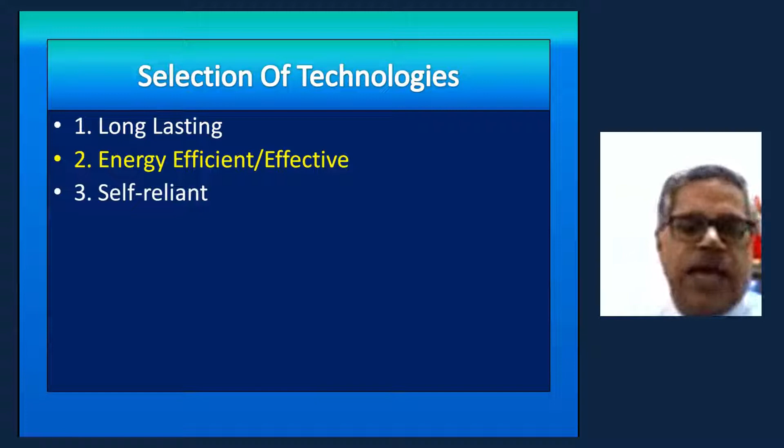So how we select a technology, that we have to see. In general, we select a technology based on it being long lasting, energy efficient and effective, self-reliant—meaning we should have that technology with us and be able to develop it further in-house—and then eco-friendliness. How much weightage we give to eco-friendliness depends on how much knowledge we have about the eco-friendliness of the system, or how much budget it takes to save the environment or our health.

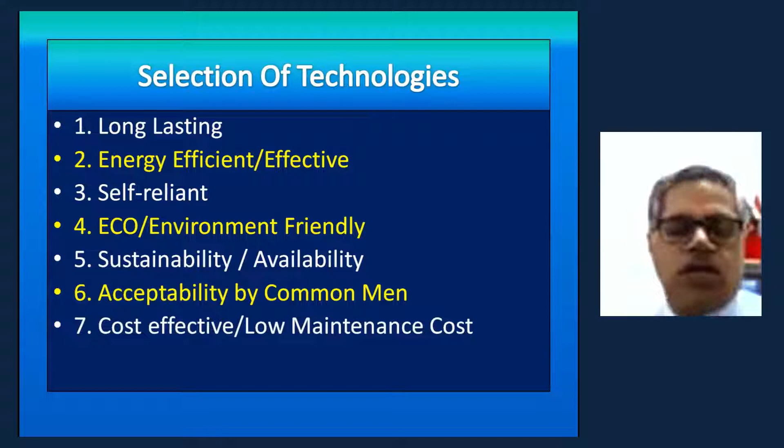Then we see sustainability. The project, whatever it is, should sustain itself—basically it should generate the same revenue and we should not require any fund from outside. But let us see whether we require fund from outside or we can generate fund ourselves. Then comes acceptability by the common man. Whatever mode of transport we select, we have to see its acceptability by the common person. Then it should be cost effective with low maintenance cost, and finally the availability of fund and the political will.

We have seen different kinds of mobility in cities like car, taxi, buses, cycle, pedestrian, metros, tram, trolley, and private car. And a few other modes of transport: airplane, subway, taxi, buses, tram, railways, bike, cableway, and ship. But now we divide all these transportation systems into two different categories.

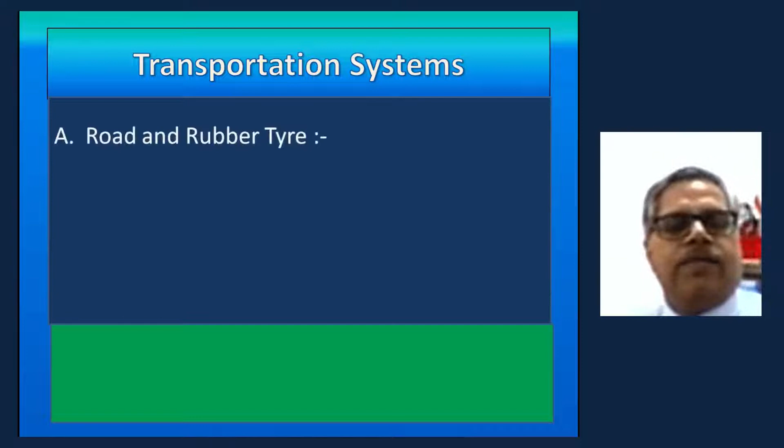Category number one is road and rubber tire. Here we use the road made of asphalt or cement, and run over it two-wheelers like bicycle, motorbike, and scooters, three-wheelers like auto rickshaw and battery rickshaw, and four-wheelers like taxi, minibus, city bus, trucks, and finally we are heading towards electrical buses and electrical trucks. The second mode is railroad and steel tire, which includes Indian Railway, Metro Rail, Metrolite, and the dedicated freight corridor for goods transportation.

Now coming to why we should avoid the personal vehicle, you can see the comparison. For transporting 50 people from one place to another, we require road space. You can see the road occupation by pedestrians: on the left side, 50 pedestrians are grabbing that much road. Then 50 cyclists, then 50 people in a bus, and then if we use personal vehicles, 50 people in 33 cars, you can see how much road we need.

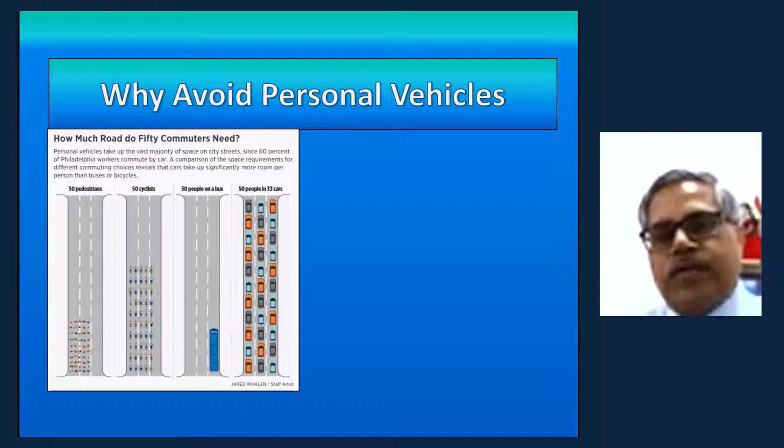Now coming to carrying 50,000 people per hour per direction in a city: if we have only cars, it requires about a 175-meter wide road. If we switch over to buses, it is still big, but only 35-meter wide road, and since space is reduced, we have room for some greenery. When we go for the metro, it requires only a 9-meter wide track, with lots of greenery from one side to the other.

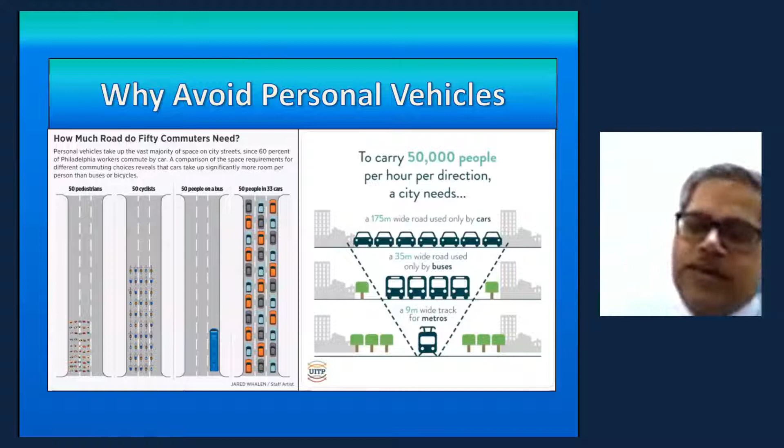Now coming to pollution. Normally when we see pollution, it means whatever we can see, but there is some pollution which we cannot see. So we will be seeing here exhaust versus non-exhaust pollution. Till now we are concentrating only on exhaust pollution, and thereby we are taking all the steps.

This chart shows that exhaust emission is only 14% out of the total pollution created by vehicles. The remaining 86% is either from wear of brakes, wear of tires, road wear, and the resuspension created by the vehicle when it drives on the road.

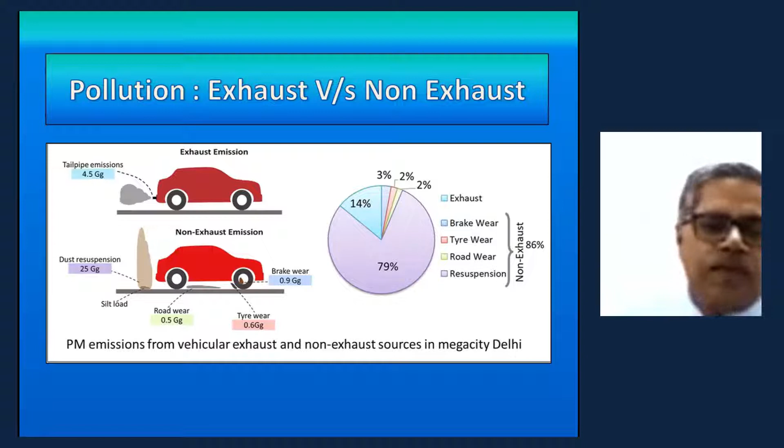Why eliminate rubber tire? Why am I so concentrating on eliminating the rubber tire on the road? We will see the tires are plastic polluters, and they are a sneaky source for all pollution.

What are the environmental hazards? By 2015, about 322 million tons of thermoplastic was created for production of tires. And out of that, by 2010, about 12.7 million tons has gone into the sea and river. Pollution of the environment with plastic is recognized as a serious global threat because it can negatively affect human health, aquatic organisms, as well as the economy.

Tire wear and tear is a sneaky source of microplastic in our environment, which can only be addressed effectively if awareness increases, knowledge gaps in quantities and effects are closed, and creative tactical solutions are sought.

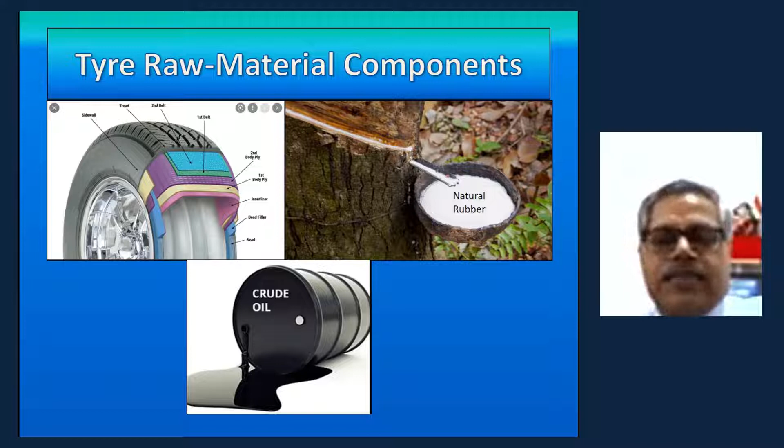Now let us see what the tire is made of. The tire is basically made of natural rubber, which is then mixed with crude oil to give it the shape of a tire. A tire is made of about 19% natural rubber, 24% synthetic rubber, and for making one car tire, about 7 gallons of crude oil is consumed, and for one set of truck tires, 22 gallons of crude oil is consumed. So producing tires still has a monumental environmental impact.

Number one is deforestation: we are removing trees that have stopped giving natural rubber. Similarly, climate-harming fossil fuels are used to make synthetic rubber. But what is also becoming increasingly clear is that as rubber wears and tears, it throws off tiny polymer particles that often end up as pollutants in the ocean and water.

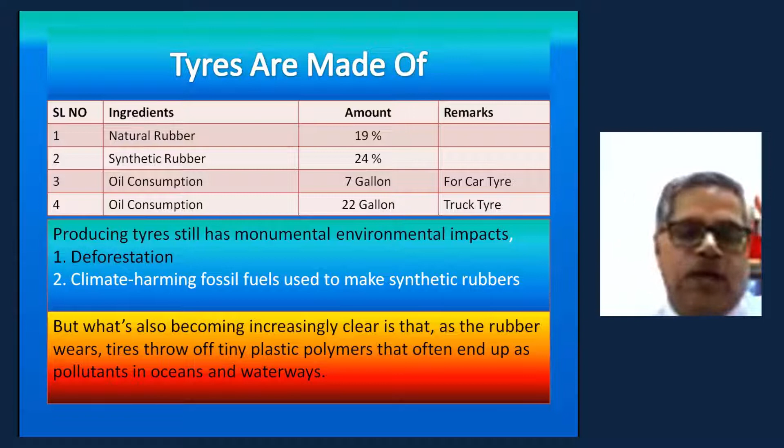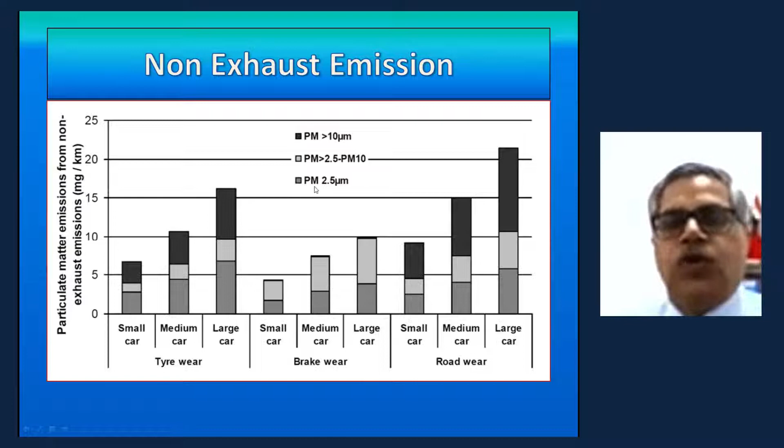What is the problem with the 2.5 micron particle, known as PM 2.5? It cannot be filtered by the normal mask which we wear while driving our cars or going outside. So it is a cause of concern that these 2.5 micron particles need to be taken care of.

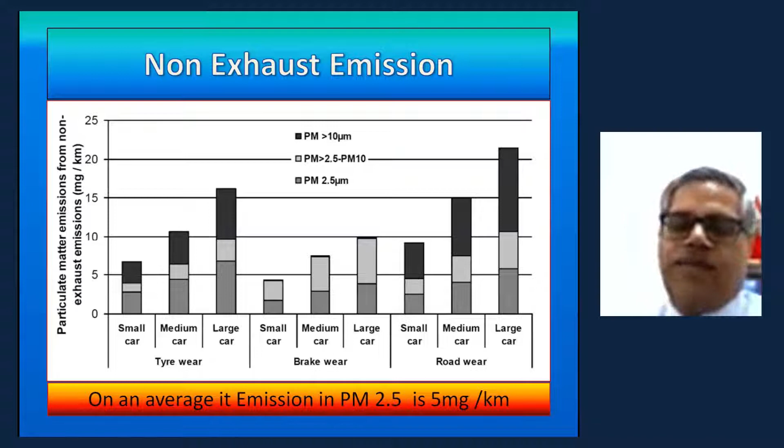On an average, its emission in 2.5 particles is 5 milligrams per kilometer. So if a car drives 1 kilometer, it creates about 5 milligrams of PM 2.5 pollution.

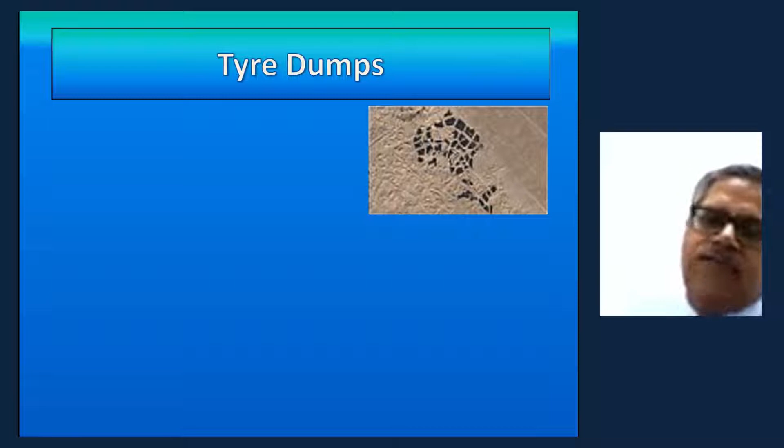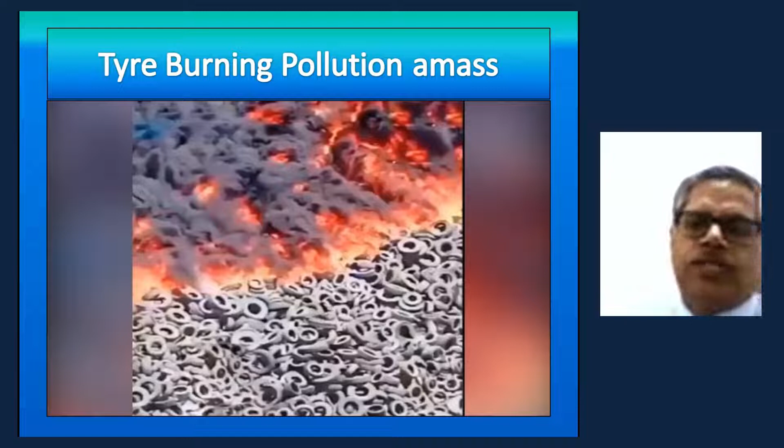Here is a figure taken from satellite. It appears to be a very nice, artistic figure, but this is basically a figure of a tire dump. From the near view, you can see this tire dump, and you can imagine, if it can be seen from satellite, how huge the tire dumps are on earth. Then they burn the tires in a mass to destroy them, which is also one of the major causes of pollution.

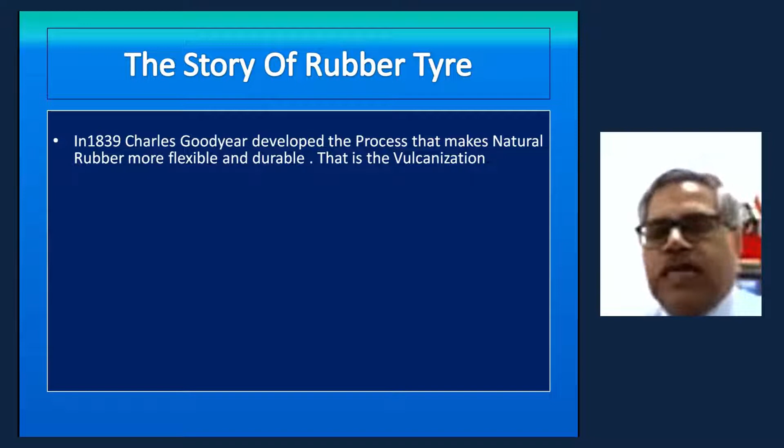If we see the story of rubber tires, it started with the invention of a new method known as vulcanization, for making rubber more flexible and durable. It was started in 1839 by Charles Goodyear.

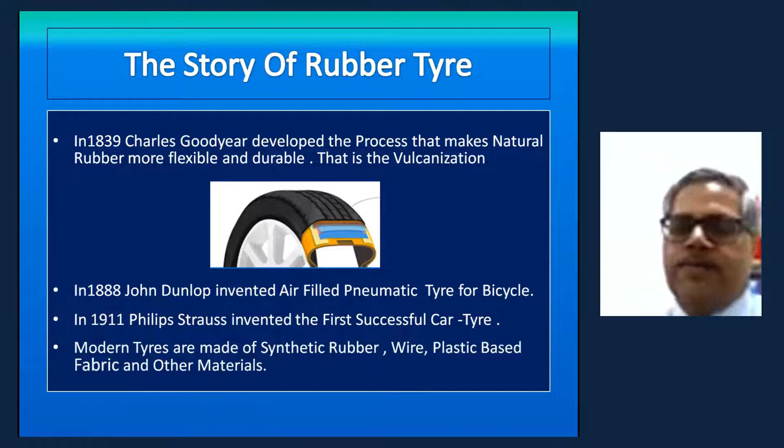In 1888, John Dunlop invented the air-filled pneumatic tire for bicycles. In 1911, Philip Strauss invented the first successful car tire. Modern tires are made of synthetic rubber, wire, plastic-based fabric, and other materials.

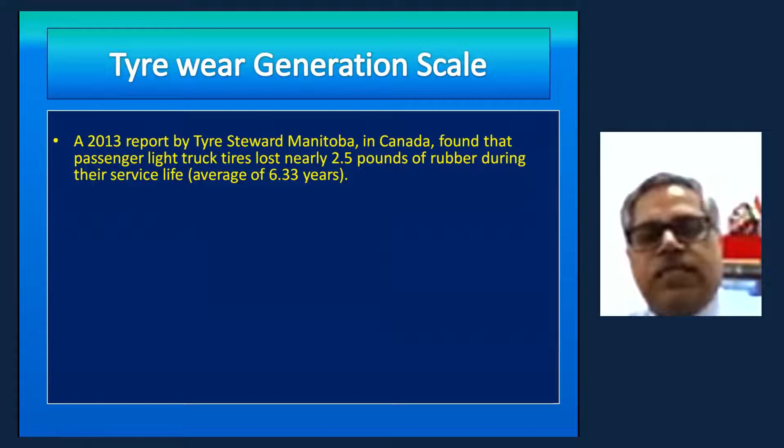Tire wear generation scale: if we look at the scale of tire wear generation, about 2.5 pounds of rubber is generated over the average life of 6.33 years of a tire. This is found from the study. Similarly, about 1.8 million tons of microplastic is generated by the US every year.

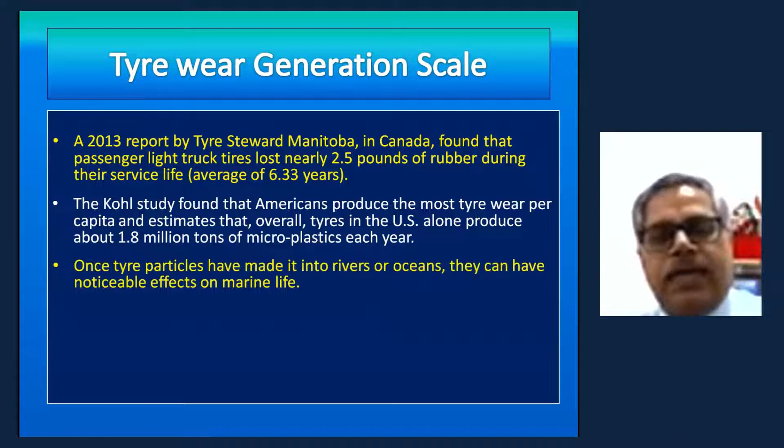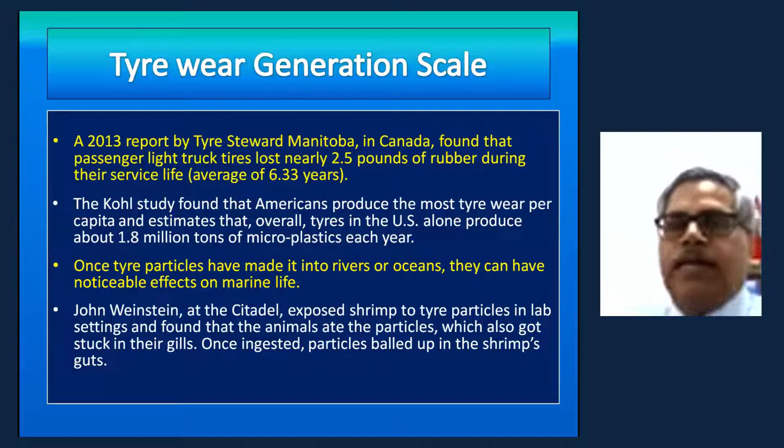Once tire particles make it into a river or ocean, they have a noticeable effect on marine life. John Weinstein at the Citadel exposed shrimps to tire particles in a lab setting and found that the animals ate the particles, which also got stuck in their gills. Once ingested, particles balled up in the shrimp's guts. So if you eat the shrimp, the particles go into your guts and remain there, undigested, which can create various kinds of problems.

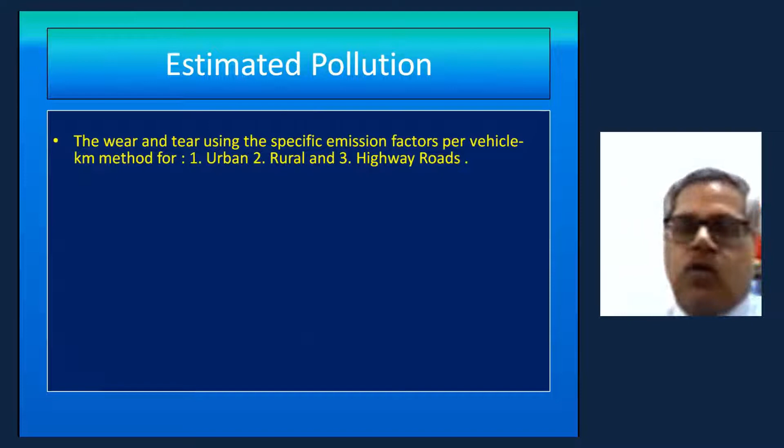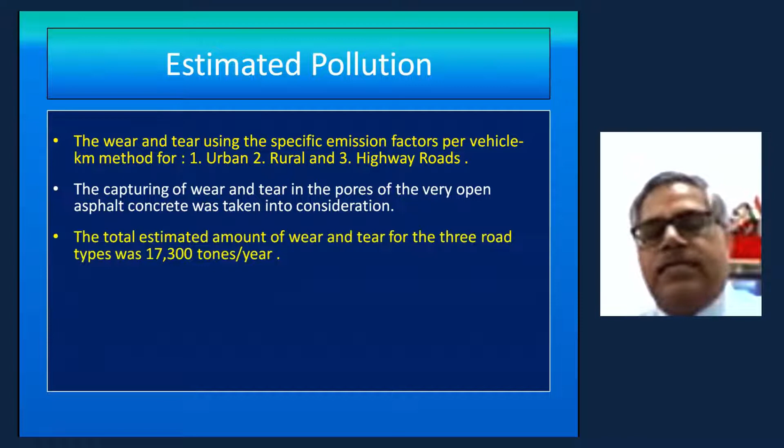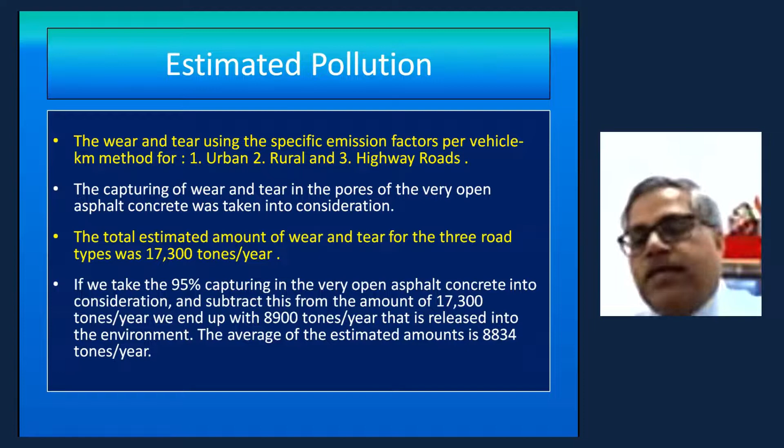Estimated pollution: considering urban, rural, and highway roads, we find that the maximum particles created by tire wear are concentrated and absorbed by the large pores in the road's concrete asphalt. The total tire wear is about 17,300 tons per year. If about 95% is captured by the asphalt and 5% goes elsewhere, that amounts to about 8,834 tons per year.

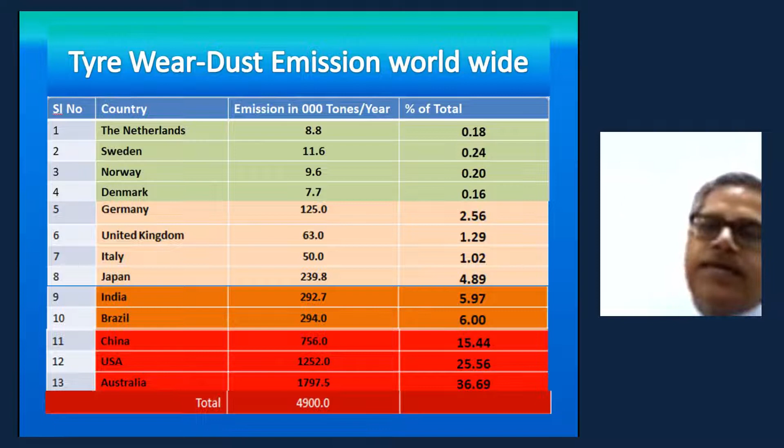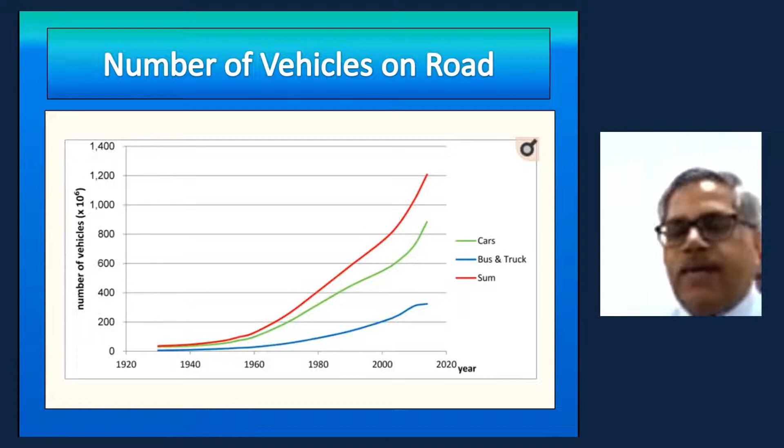The number of vehicles on the road has grown from 1920 to 2020. It has gone from starting around 50 million vehicles to 1,200 million vehicles by the end of 2019.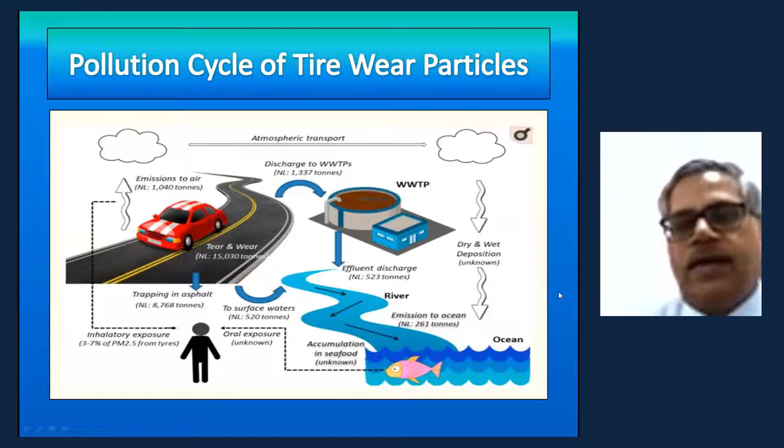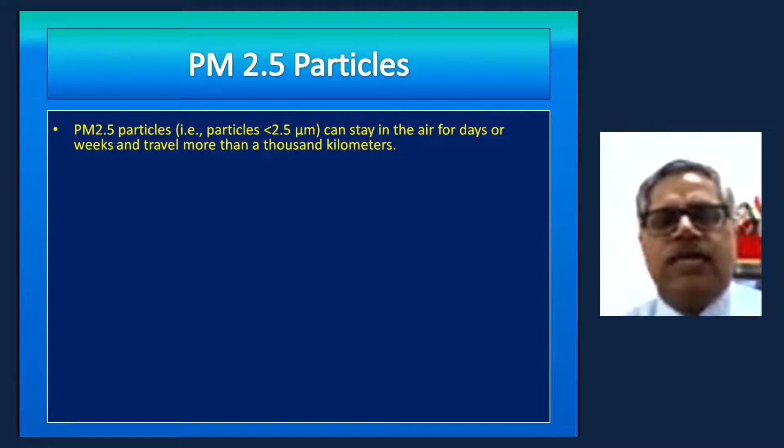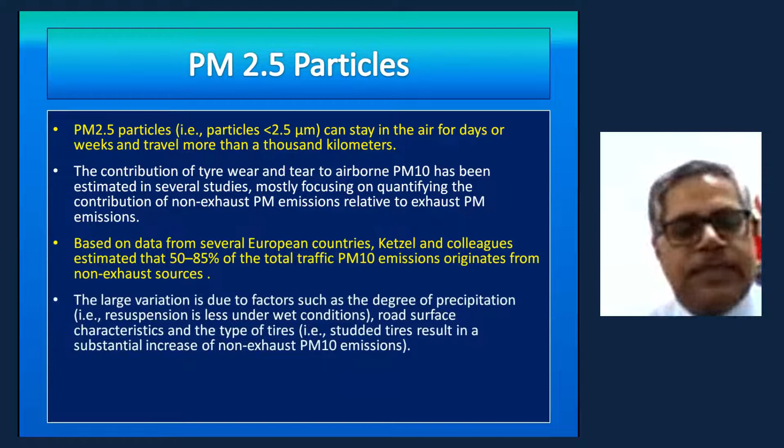What are PM 2.5 particles in the air? Once formed, they stay in the air for weeks and travel more than 1,000 kilometers. The contribution of tire wear and tear to airborne PM10 has been estimated in several studies, mostly focusing on quantifying the contribution of non-exhaust PM emissions relative to exhaust PM emissions. 50 to 85% of total traffic PM10 emission originates from non-exhaust sources, with large variation due to factors such as the degree of precipitation, road surface characteristics, and the type of tire.

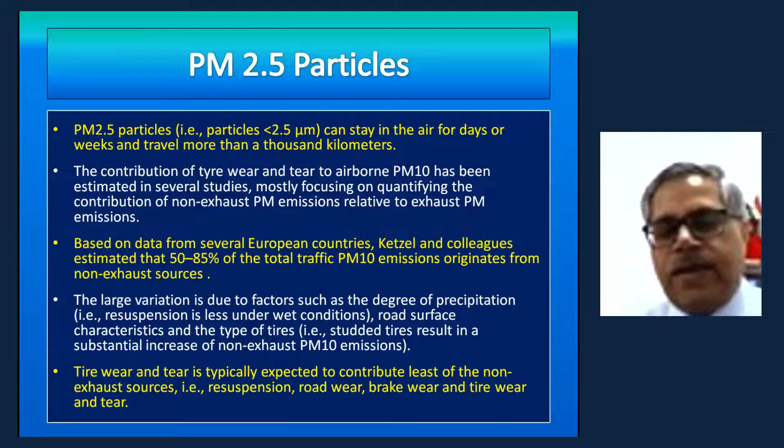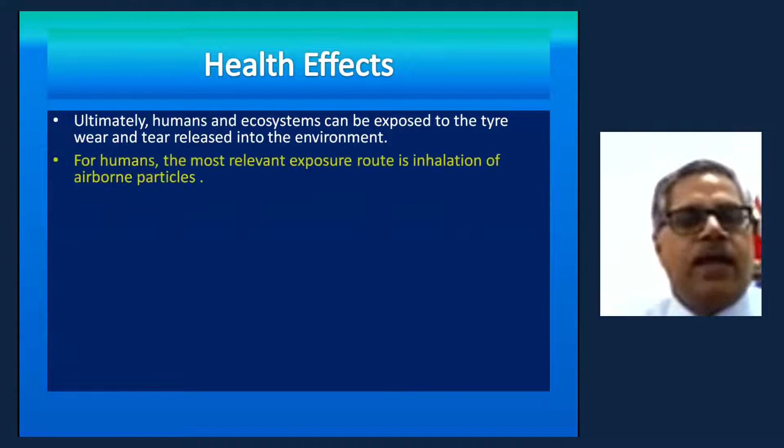Tire wear and tear is typically expected to contribute least among non-exhaust sources, that is resuspension, road wear, brake wear, and tire wear and tear. Now, seeing to the health effect, ultimately human and ecosystem can be exposed to the tire wear and tear released into the environment, and for humans the most relevant exposure route is inhalation of airborne particles.

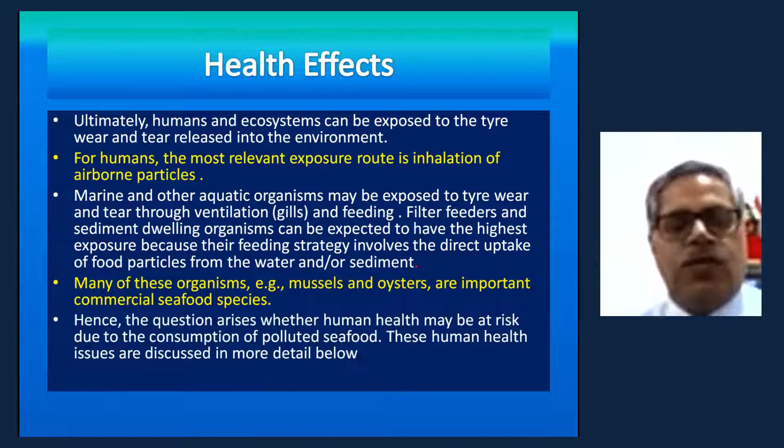Marine and other aquatic organisms may also be exposed to tire wear and tear through ventilation, gills, and feeding. Filter feeders and sediment dwelling organisms can also be exposed. Many of these organisms, that is mussels and oysters, are important commercial seafood species. Hence, the question arises whether human health may be at risk due to the consumption of polluted seafood. These human health issues are discussed in more detail below.

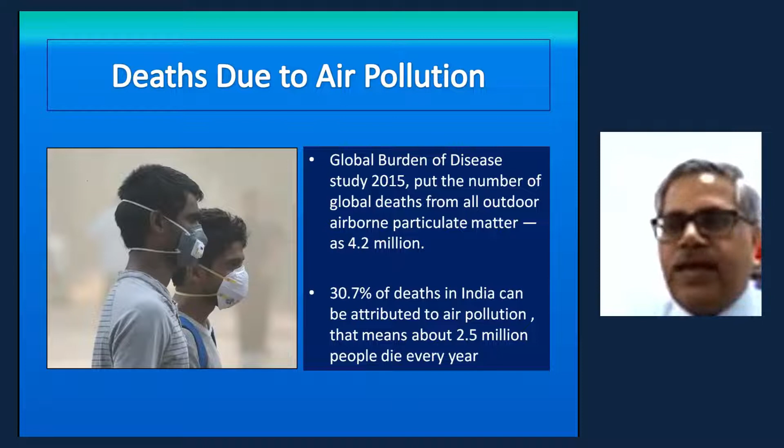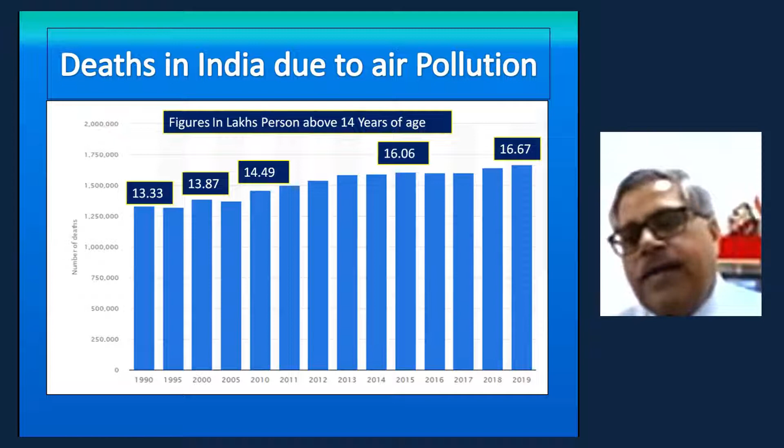If you see the deaths due to air pollution, globally about 42 lakh people die every year because of air pollution. And if we see India, about 30.7% of deaths in India can be attributed to air pollution, that means about 25 lakh people die every year due to air pollution. Death in India due to air pollution has increased since 1990. It was 13.33 lakh persons above the age of 14 years, and it has gone up in 2019 to 16.67 lakh people.

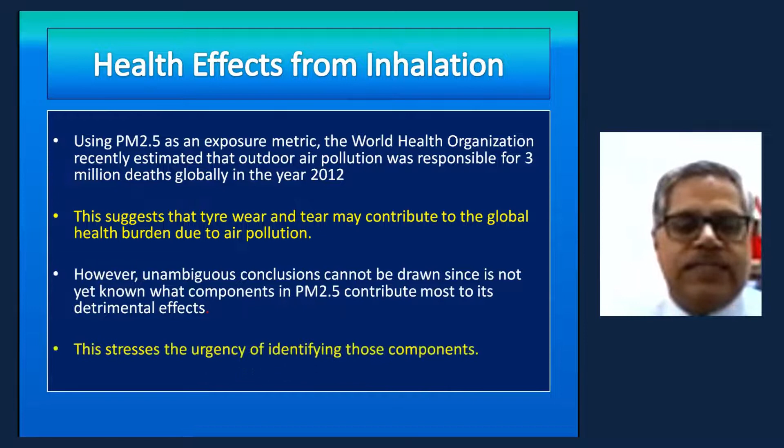Health effect from inhalation: using PM 2.5 as an exposure metric, the World Health Organization recently estimated that outdoor air pollution was responsible for 3 million deaths globally in the year 2012. This suggests that tire wear and tear contribute to the global health burden due to air pollution. However, an unambiguous conclusion cannot be drawn since it is not yet known which component in the PM 2.5 contributes most to its detrimental effect, which is yet to be studied. This stresses the urgency of identifying those components.

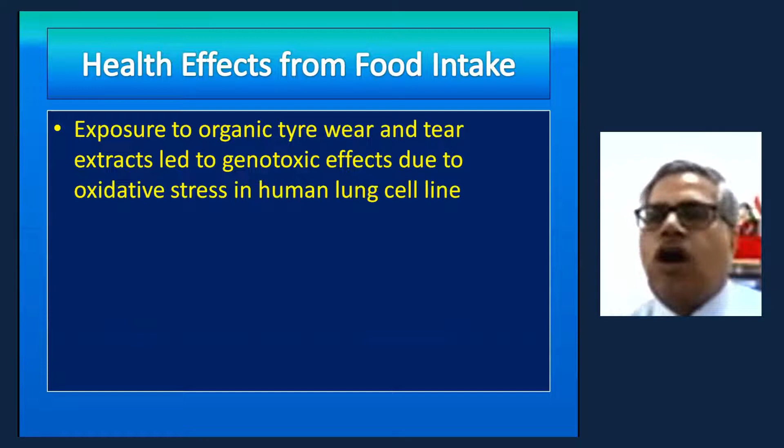Health effect from food intake: exposure to organic tire wear and tear extract led to genotoxic effects due to oxidative stresses in human lungs. It means if you are affected, then your offspring will also be affected automatically, like a genetic disease.

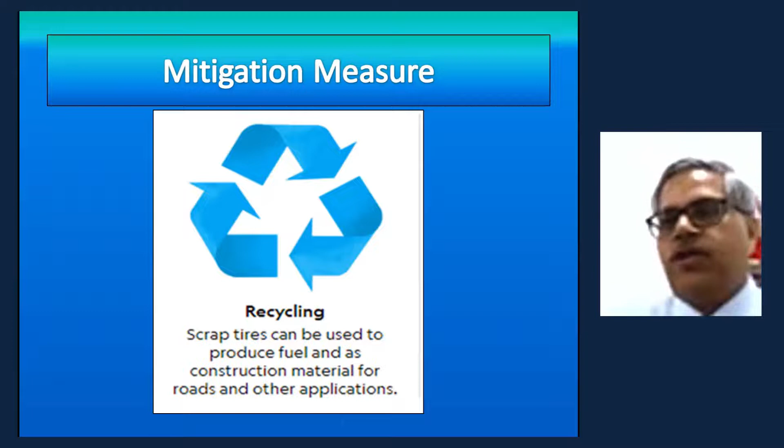Now coming to the mitigation measures. The first mitigation measure offered by people is recycling of tires. But once you permit this recycling of tires, you do not reduce the production of tires, and thereby you're not reducing the number of tires on the road.

The second mitigation measure is to reduce production. Here you can see that in 1990, 1,000 million tires were being produced, which by 2017 reduced to 60 million. So it may look very good that we have reduced from 1,000 million to 60 million tires. But if you really see what is happening, though tires have not been produced as much, people have started the retreading business. Retreading business is filling the gap of the total requirement of tires. Since the total number of vehicles are increasing on the road, the total number of tires are not actually reducing.

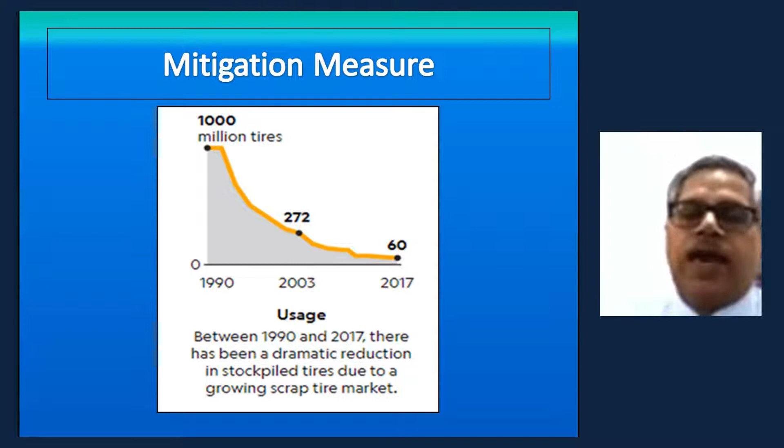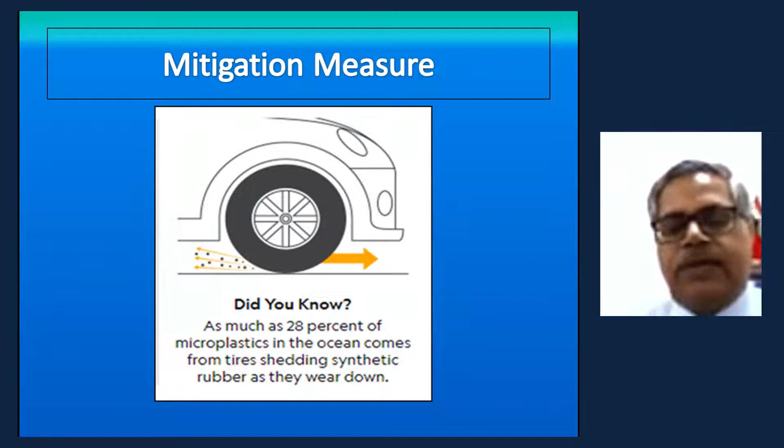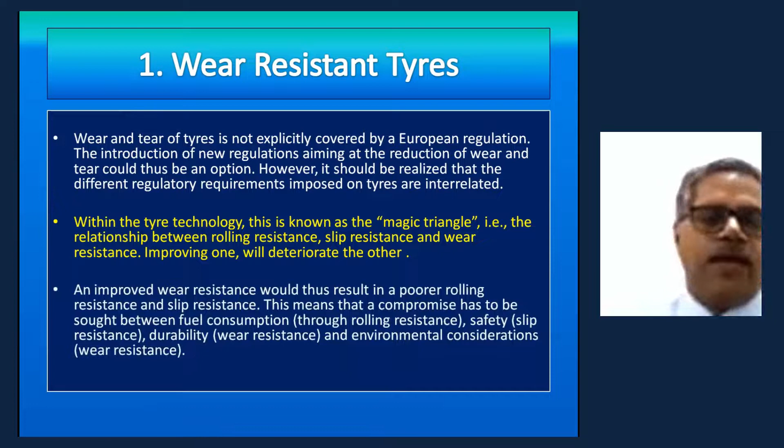Now coming to the next mitigation measure: as per estimates, 28% of microplastic in the ocean comes only from tires shedding synthetic rubber as they wear down. So the first mitigation measure suggested by engineers is wear resistant tires. But when we go to wear resistant tires, there is a concept of a magic triangle. The magic triangle basically says that between rolling resistance, slip resistance, and wear resistance, if you improve one, another will worsen. Therefore, you are compromising on other things. If we reduce the wear, then we may be compromising on safety because of slip.

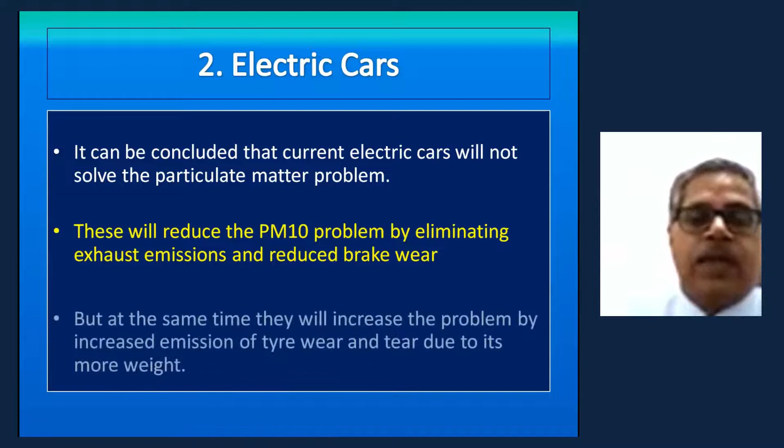Second thing, we can go for electrical cars. If people are saying for reducing pollution we can go to electrical cars, but electrical cars only reduce, as apparently seen, the exhaust pollution. But till India is going for total nuclear power plants, we are producing much more pollution at the power plants than what an actual petrol or diesel car produces per kilowatt. So it can be concluded that current electrical cars will not solve the particulate matter problem. And one more thing which we have seen is that electrical cars are heavier than petrol and diesel cars because of the battery weight, and because of that the tire wear will increase if we use electrical cars.

Now coming to the self-driving car: to reduce wear and tear of tires, you can say we will go to self-driving cars, which sense several things and take turns accordingly, so it will reduce tire wear. But whether it is going to contribute to that extent is yet to be seen, because again the magic triangle comes here, and it takes the maximum advantage of the magic triangle to give you the optimum wear and tear, but it will not reduce the wear and tear.

Now you can say that whatever wear and tear is there, we will create a wastewater treatment plant.

But if you want to create the wastewater treatment plant which is really going to help us, that is very costly, and it is going to cost the world very expensively, and we will not be able to take care of all of it.

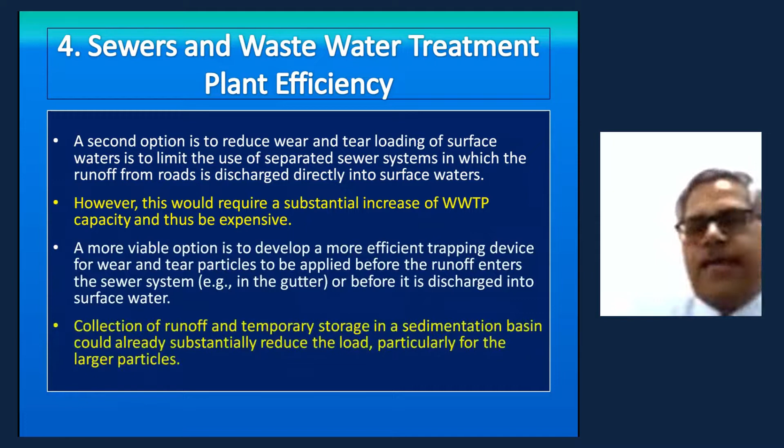Then civil engineers come into picture. They will say we will give you the road with open asphalt concrete, which absorbs all such kind of wear. But even if it absorbs 95%, the 5% goes into wear, which is very high. So the pavement material is an important factor of tire wear. The pavement could be designed to reduce this.

Now we are making these cement roads, which are causing more wear and tear. So either we use the durable road or the durable tire, we are not going to reduce the problem.

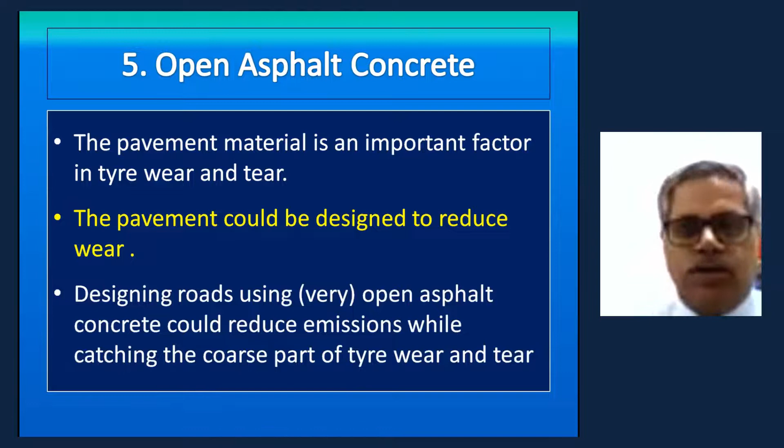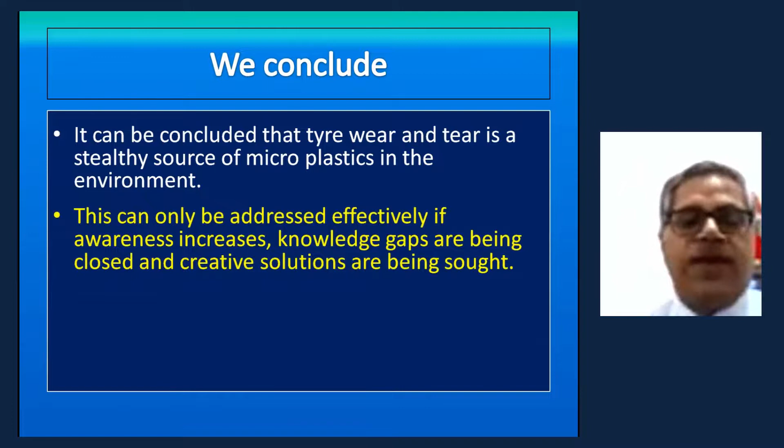So finally, we conclude that tire wear and tear is a stealthy source of microplastic in the environment. This can only be addressed effectively if awareness increases, knowledge gaps are closed, and creative solutions are sought. This requires a global effort from stakeholders, consumers, regulators, industries and researchers alike.

Now let us see the budget on health, how much budget we are giving on the health concern. About 86,200 crores was sanctioned in 2022-23 for the health budget, which was about 16.6% more than the last year. And if you really see, last year we finally expended 86,000 crores, and this year we are going to spend more than 86,200 crore because health problems keep on increasing.

Budget estimate on the National Health Mission is also there. In 2022-23, we are giving 37,000 crore rupees, which was earlier 34,000 rupees. So it is also increasing year by year.

Then coming to the Pradhan Mantri Swasthya Yojana, we are giving about 10,000 crore rupees this year. Last year it was 7,400 crores, so this is also increasing. So health budget is increasing, we have to see that. The total health budget, if we see, it is 1,33,200 crores.

Now, budget on road transport. If we see the budget on road transport in 2022-23, it is about 1,99,108 crores. Last year it was 1,31,149 crores. The beauty of this is it is about 52% higher than the last year.

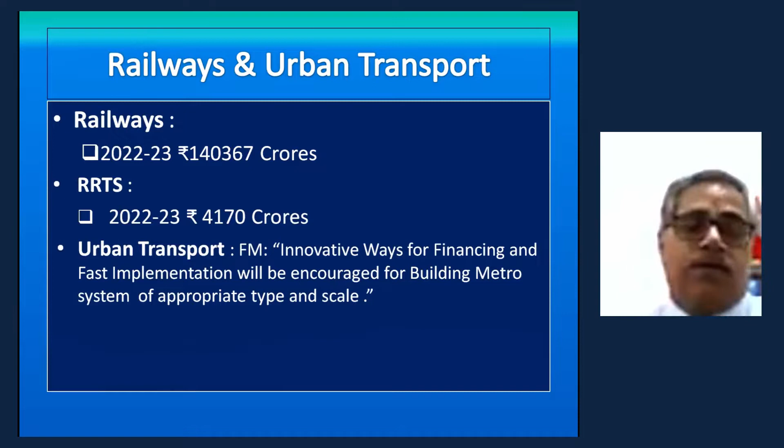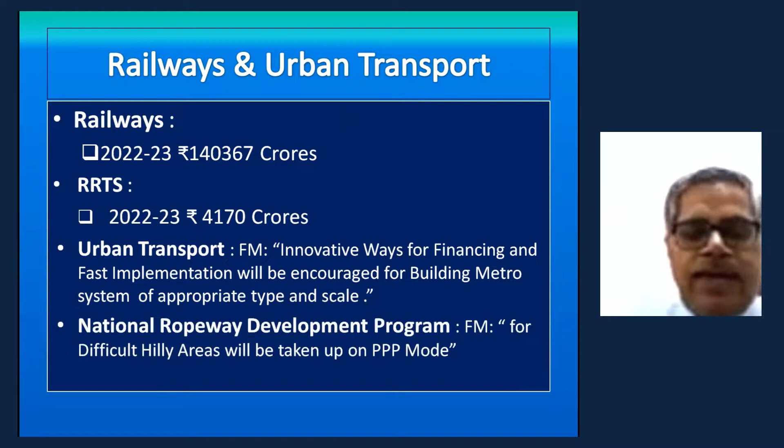It means the budget is not there for creating metro systems. Similarly, for national ropeway development, it is told that difficult hilly areas are to be taken up under PPP, meaning the government does not have budget for this.

Auto reduction of the budget requirement: once we give more funding to railway traffic, that is steel wheel and steel rail, the healthcare budget is estimated to reduce by 1% in the first year. In the second year it will be 2%, in the third year 5%, and finally the target is to reduce it by 30%, because this 30% budget goes into curing diseases related to the respiratory system.

Road infrastructure budget requirements will also reduce. Initially we have asked for a reduction of 10%, then in the second year 20%, and finally the target will be 50%. So we have seen the means of transport, what transport is to be used and what is to be chosen for better health of the budget, economic health, as well as the human health of the people.